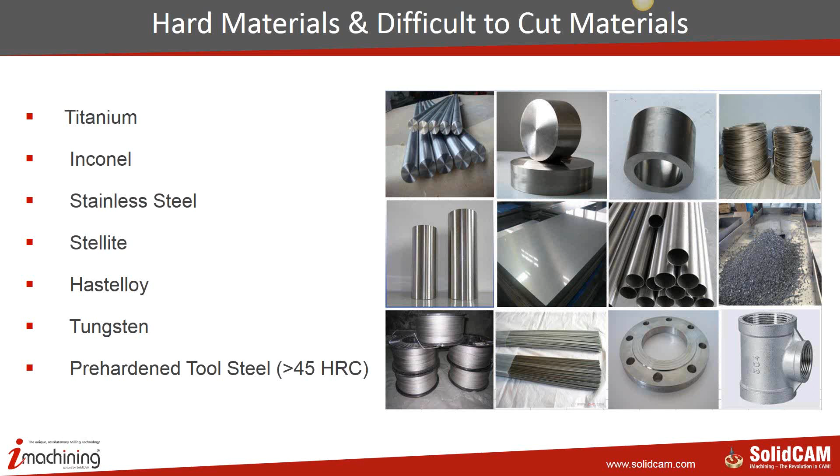So basically, this webinar in the next 45 odd minutes, we're going to delve deeper into the technology of iMachining, how to practically apply iMachining to such materials, how should you look out for tools, how should you look out for lubrication, what should be your work holding, what should be your tool holding, several things along with the programming style and programming strategies.

Inconel, tungsten, and stainless steel alloys, they are very typical materials. Basically, they have got high strength, especially Inconel. It's got a pretty high strength, corrosion resistance. Some of these materials are age hardenable. That means keep them for a longer time, they start hardening up. High heat resistance, and they are also pretty stable.

For example, Inconel is having a very high heat resistance, and it's pretty stable at very high temperatures, close to 1,000 degrees. It can withstand a lot of heat. Now, because they have this high heat resistance, it also means that they have got very poor thermal conductivity. Now, this is one of the reasons why machining such materials is really difficult, is the conductivity of heat.

Inconel, for that matter, has got a rapid work hardening tendency. So if you're not careful with your parameters, if you're not careful with your lubrication, after the first cut, you could be inducing work hardening into the material, and then the subsequent next cut becomes very difficult to take. Tools just chip off, they just burn out while cutting Inconel. And obviously, putting all of these things together, except for aluminium, most of these alloys have poor machinability.

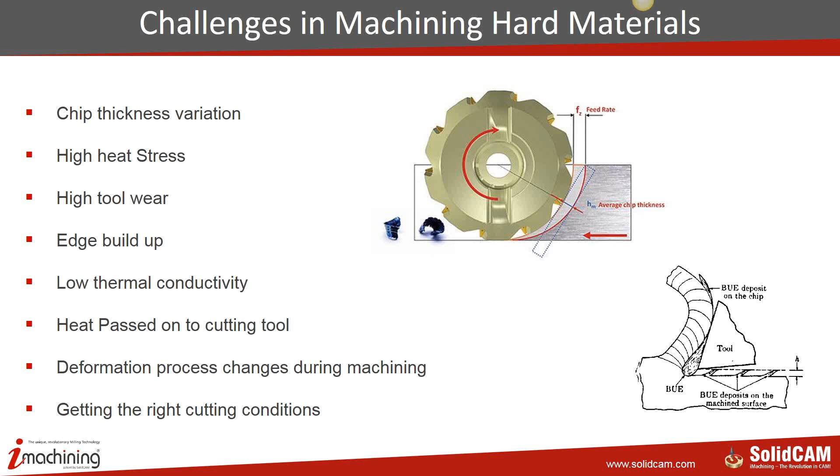Now, if you look at the machining process itself, there are several things that influence the machining. First of all, the machine: the power of the spindle, the construction, the rigidity of the machine, the rigidity of the axis, and what control you're using on it. These factors affect our machining from the machine side.

The other thing that influences machining is the cutting tool itself. What grade of carbide? What is the tool geometry? How are you holding the tool? What is the helix angle? How many flutes? There are several things from the tooling side that also affect machining. The other important aspect here is your work holding itself.

If you have poor work holding, you cannot be aggressive with cutting. You have to drop down all of your aggression and go with a very low or moderate level of aggression. But if your holding is extremely good, like Schunk kind of holding devices, where you hold very little and it has a really high clamping force, you can be more aggressive in the cut. And sometimes aggression can actually increase your tool life in the case of materials like Inconel.

You also have the coolant. There have been several experiments on having everything perfect, and experiments have concluded that a cutting fluid lubricant with 8% cutting oil mixed with demineralized water can give extremely good tool life. Even varying the percentage of the oil in the demineralized water can make a big difference.

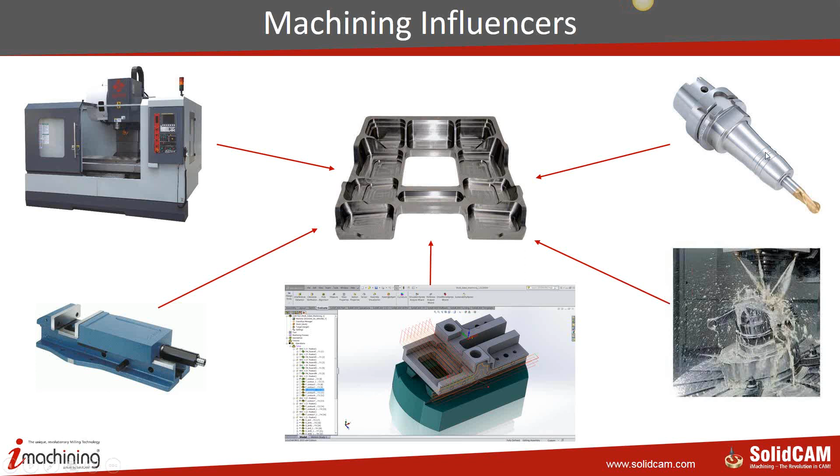From our side, we don't have much control of the machine, the tool holding, the coolant, or the work holding. But we can greatly influence the creation of cutting conditions and adherence to the cutting conditions using a program called iMachining. So you have to understand what iMachining is all about.

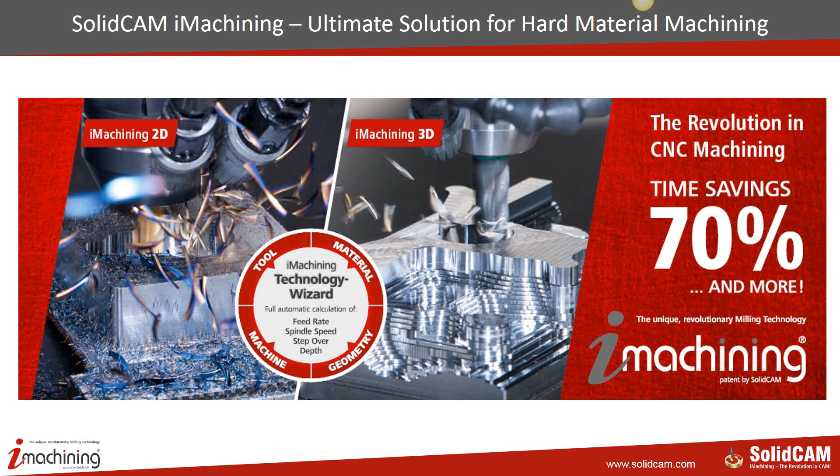iMachining basically is a revolution in CNC machining. It's the next step after CNC was born, because it has taken the CNC world by storm, basically because it's an out-of-box solution. It doesn't go by the conventional rules of machining; it's completely out-of-box, yet adhering to the basic principles of milling.

These features are like productivity increase and time savings by shortening the cycle times by 70% or more, and dramatically improving the tool life. I'll explain to you how the tool life goes up, because we have documented evidence that the tool life goes up dramatically.

It's said in iMachining that the harder the material, the better the performance of iMachining, and it's true; we have seen with our own eyes that the performance of iMachining goes up exponentially when you cut really hard materials.

Now, one of the biggest features of iMachining is its ability to handle small diameter tools. You would have seen other softwares also talk about toolpaths similar to iMachining. But if you observe closely all the videos of other systems on YouTube and other places, you will notice that none of them really talk about tools less than 12 diameter or 10 diameter. Nobody talks about 6 diameter, 8 diameter, 4 diameter, 2 diameter.

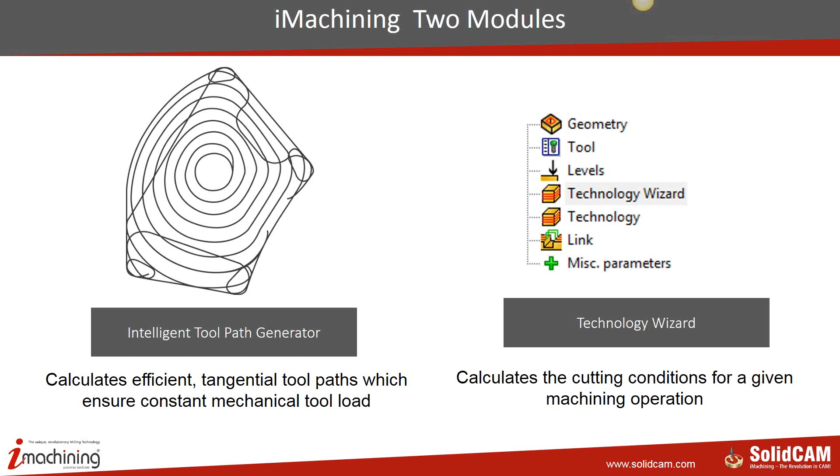So both of these generate a very intelligent toolpath, which has got a very unique pattern, and the pattern follows those set optimal cutting conditions. So the end result is that you get a very intelligent toolpath, which is ready to run on the machine.

If you look at the difference between iMachining toolpath and standard cutting toolpaths that you see in CAM systems, the standard cutting toolpaths have the philosophy of using a traditional step-over principle, where they take the outermost boundary and keep collapsing it by offsetting it until it reaches the center and it cannot be offset anymore. And this offset is based on the step over that we define.

Now imagine your tool, okay, on this particular path here. When it gets to this particular path, or worse condition, when it gets to this path here, the tool, as you see here, is completely engaged, more than 180 degrees. Now imagine if you're taking a big depth of cut and you've engaged the tool more than 180 degrees, the amount of cutting force that is there on the tool is going to be tremendous.

That's why when I say that iMachining excels when you're using a smaller tool when cutting, it's that when you cannot control your tool load, and if you're using a smaller diameter tool, you're going to break the tool straight away, because the force acting on the tool is so high that your tool will just chop off.

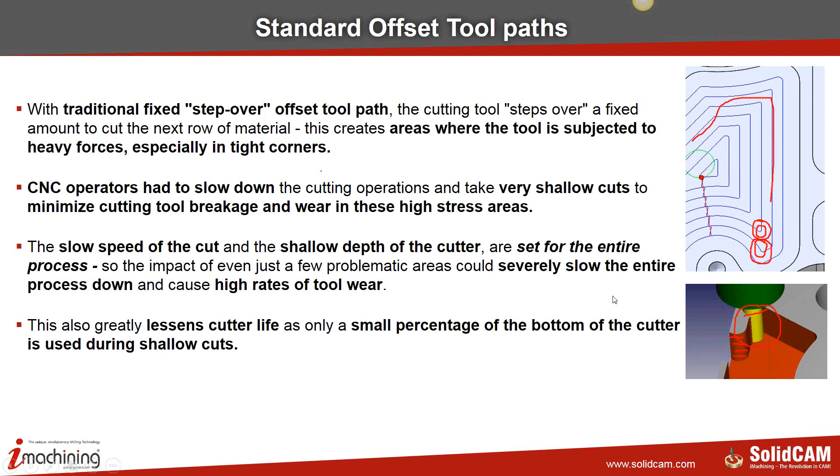So iMachining overcomes the majority of the problems that the conventional toolpaths are offering you. First of all, it generates smooth tangential toolpaths. So even when there's a change of direction, it's pretty smooth.

It doesn't put any kind of load on the axis. So the tool paths are always tangential. We have another patented technology, and that is controlling the step overs. We have a minimum and a maximum step over based on the engagement of the tool with the material.

So if the engagement is more, you will see that the step over is less there, and if the engagement is less, the step over is more. Now, based on our step over and engagement, the feed rates are calculated. So if you have got more engagement or a bigger step over, the feed rates drop down. If the engagement reduces, the feed rate goes up.

This is done to ensure that you have got a uniform cutting load, or my chip thickness is going to be uniform throughout the cut. It doesn't matter if you're cutting a straight line or an acute angle. My chip thickness is going to be the same.

We also have exact stock machining. That means we precisely know how much stock is remaining and where it is remaining. So we don't just go and cut air, but we precisely know where the material is remaining, and we cut exactly the stock.

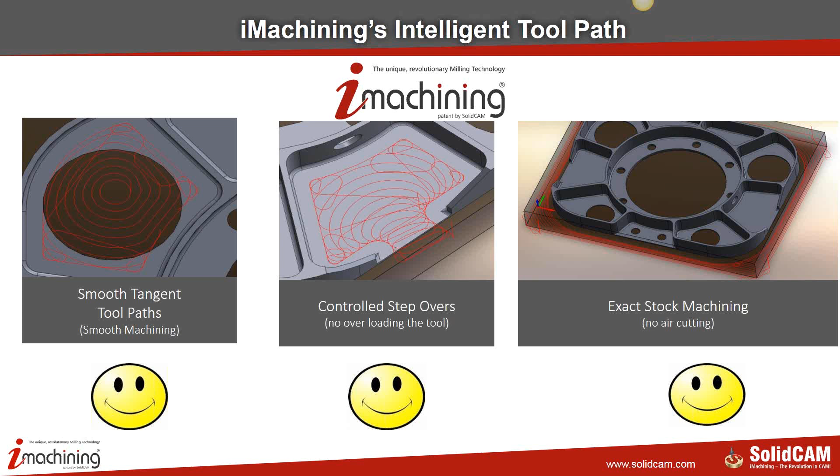So if I have to sum up the features of iMachining, it's got a unique tool path pattern, like what you see out here, and it's got constant cutting force based on engagement angle. It varies the engagement angle, thereby dropping or increasing the feed rate, maintaining constant chip thickness. Optimum cutting conditions, generated based on machine, material, tool, and geometry.

And the most important thing is vibration control, where we can predict, even before the machine is started, what kind of chatter we are expecting in this entire process. And we also have ways to avoid it, which we're going to see soon.

Now, how did iMachining start at all? Many people, when I explain iMachining to them, especially the cutting tool people... Excuse me.

Sorry. I was explaining iMachining to some of the cutting tool vendors, and they came up with this statement saying that we generate a very high VC and their cutters are not suitable for such a high cutting speed. And that brings me to this slide of Solomon's theory of high-speed machining. If you remember a couple of slides back, I was referring to low depth of cut and high feed rates. This is exactly going to be the other way around.

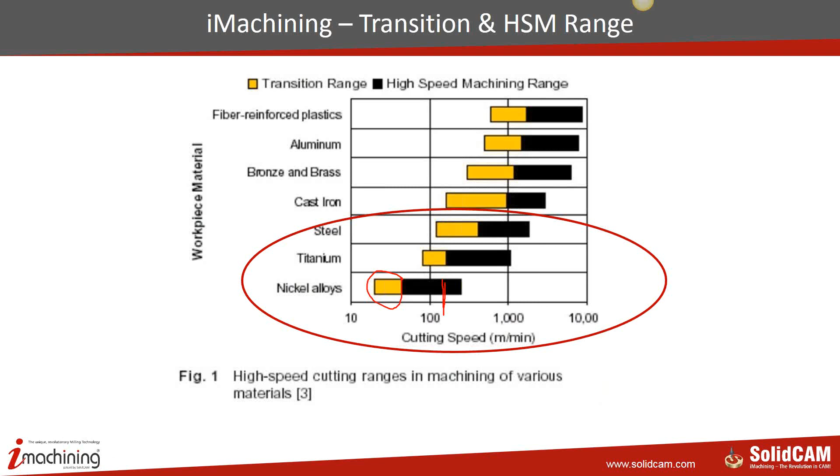So the general thing is, if I push the VC so high, will my tool withstand a material like Inconel at that high VC? Would I get tool life? The results were dramatic. From a 28-minute life, we went up to 86 minutes for the same tool, for the same material, Inconel 718. So we pushed the tool life to more than 3 times, 300%. And it's not magic. There is a lot of science behind this, and I'll explain to you why my tool life goes up even when I push the VC 3 times.

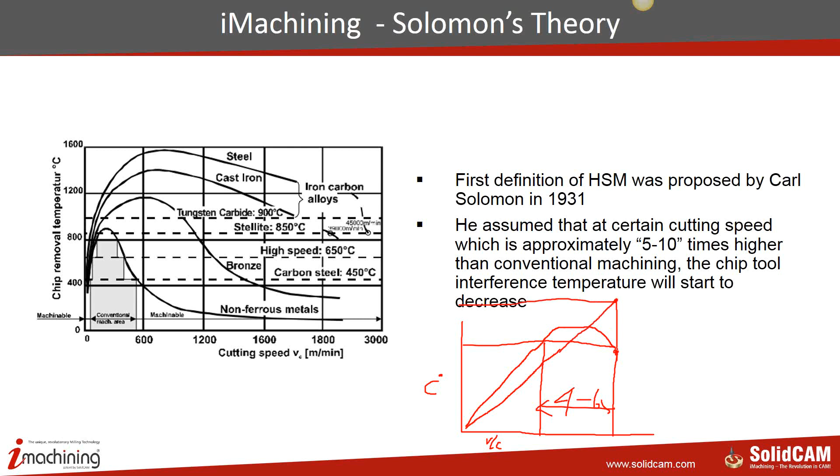Let me go back again because it's pretty interesting to come back to this figure where I explained to you that at 5 to 10 times of this VC here, I get a lower temperature. Because at 5 to 10 times, if I had to really trust my tooling guys, this would have been my temperature. But actually my temperature is much lower. So what is causing it? That can be best explained by this slide. So this basically is explaining to us the temperature balance process.

When the first contact of the tool happens with the material, the cutting edge temperature rises. When the cutting edge temperature rises, the material starts transiting from solid to plastic phase. When it is in the plastic phase, the cutting forces to cut that material are brought down. Because my cutting forces are reduced, I spend less energy to cut. Now, because I'm spending less energy to cut, I'm producing less heat.

So you see, Solomon was right when he said when you push the VC to 5 to 10 times, you're actually producing much lower cutting edge temperatures. So your heat produced is much lower, and the cutting edge temperature actually goes down. And within a split second, it goes into an equilibrium where your temperature is always low at that high VC. So temperature rises, transition to plastic phase, cutting forces are reduced, less energy is expended, less heat is produced, which means my temperature is down.

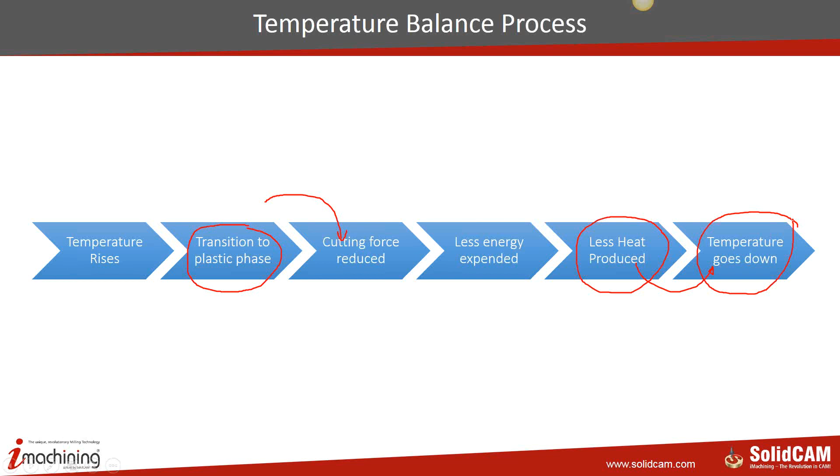iMachining, like I said, works on the principle of constant cutting force. And the constant cutting force is derived by managing the cutting angle, or the section of the tool engaged with the material. So we have got a minimum and a maximum cutting angle, and iMachining keeps the tool between the minimum and maximum engagement angle into the material, and thereby it drops or increases the feed rate to maintain constant cutting load. And this is over the entire cutting length, the flute of the tool.

Because of this philosophy, we can use small cutting tools. So if you go to YouTube, you'll see a lot of videos done with 2mm end mills on really hard materials, which perhaps you would not see with other systems which claim to have iMachining kind of toolpaths inside them.

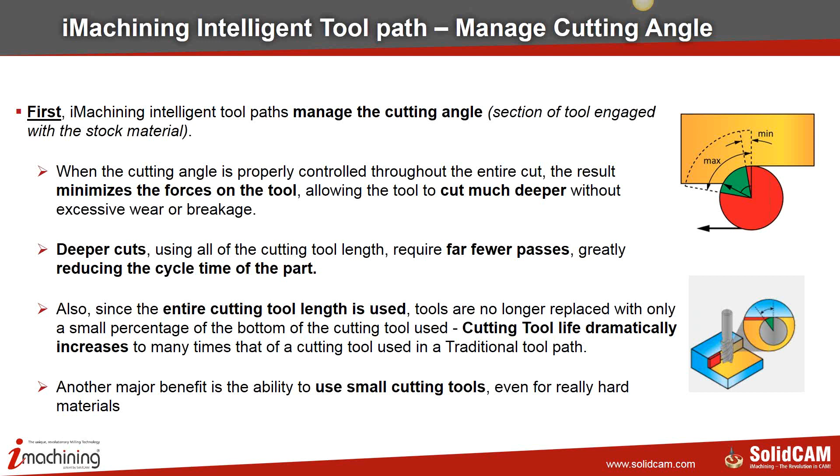Like I said, when you have different engagement angles and you would like to keep a constant chip load, for example, if you have a minimum engagement angle of 20 degrees, you have got a certain feed rate. Now if that engagement angle goes up to 60 degrees, in order to maintain a constant chip, I have to drop my feed rate. So iMachining intelligently increases and drops the feed rate based on the engagement the tool is making with the material, and thereby generates a constant load on the tool.

And if you go to any tool manufacturer, they will always say the life of the tool is estimated at a constant cutting load acting on the tool. So if you are going to vary the load on the tool, you're actually going to reduce your tool life dramatically.

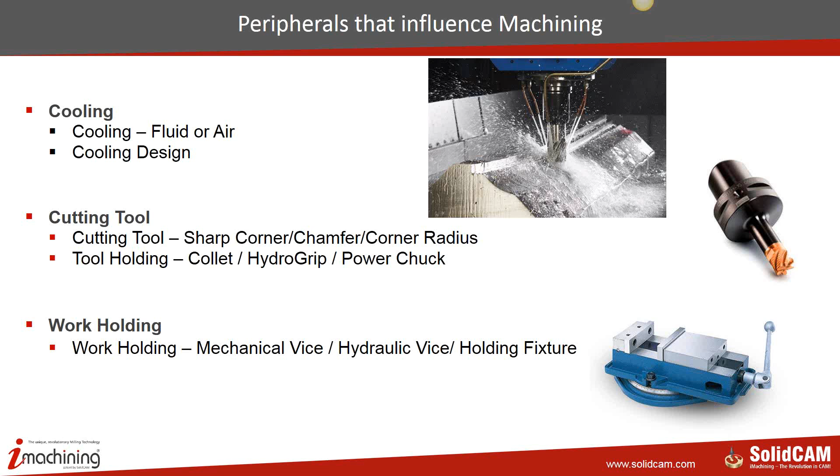Cooling plays a very important role, especially when you're cutting Inconel and titanium. We did a lot of cutting with Inconel and titanium with several of our customers and tooling vendors, and we realized that if we want to have a very good tool life, the first important thing is to have high pressure coolant.

So if you're cutting titanium, Inconel, or stainless steel, you must always use fluid lubricant, okay? Because these are sticky materials. And the goal here is to throw the chip out and, more importantly, cool the tool because the heat is being passed on to the tool.

For steel we recommend air, okay? If you're using air, direct, if possible, cool air. If not, even room temperature air is good enough. And this is a must for steel. We're talking about anything beyond 45, 50 HRC, start using air.

Because in steel, it's exactly the opposite. The heat is not actually being passed to the tool. The heat is being carried away by the chips. So if the chip remains in contact with the tool for a longer period of time, it's likely that it will pass the heat. So the moment a chip is generated, it must be evacuated. And the best way to evacuate it is to use air, right? So for steel, air.

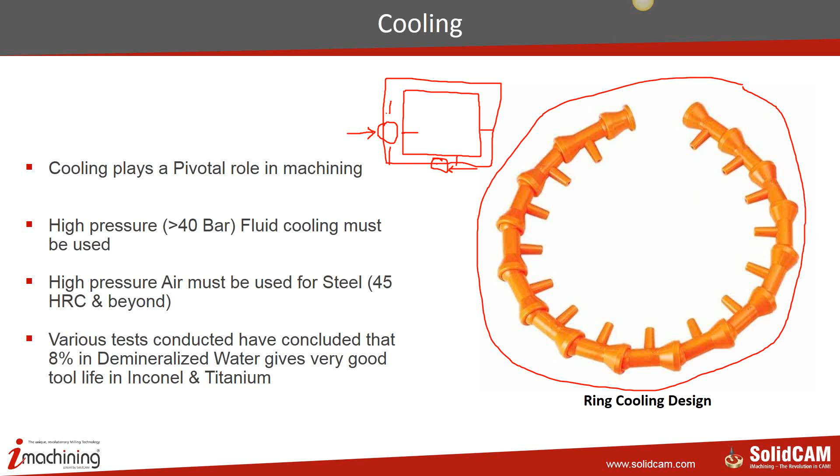Cutting tool: we suggest that when you're trying to cut Inconel or titanium, you need to use as big a tool as possible. Of course, if the geometry doesn't allow, then there's no way you could use a bigger tool. But if the geometry allows, we'd always suggest you go with a bigger tool because that has got more strength.

We suggest that you use a cutting tool with a corner radius. We have seen that sharp corner tools increase chipping because the force acting on that very small area is very high. So generally, in the very first contact, you can see that it will chip off. And why corner radius? In experiments done with Sandvik, they found that tools with corner radius give you much higher tool life than tools with chamfer. We never considered tool life with sharp end mills because generally they don't survive.

The other very important thing when you're cutting Inconel or titanium is that you should insist on tools that have honed edges. Very fine honing is done on the edges so that the edge is not sharp, but blunted to give you a very fine radius. This radius gives great strength to the tool, and the tool life jumps up dramatically. So ensure that your tools are honed and not just ground sharp.

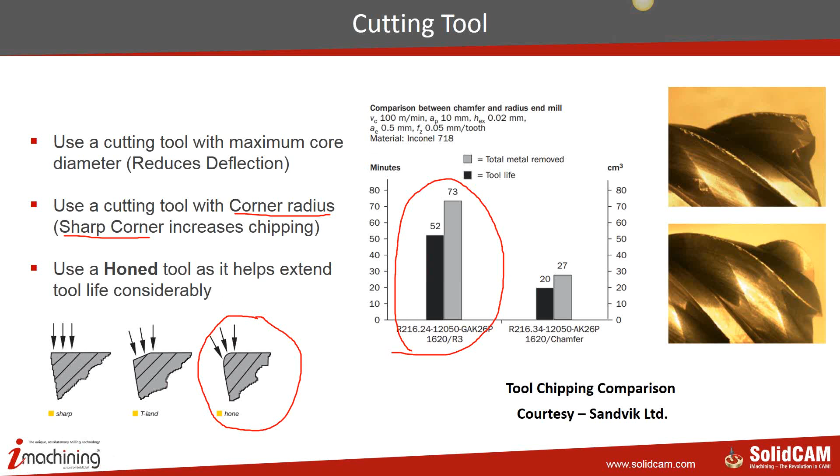Tool holding: we just do not suggest the use of collets when you're machining tough materials. When you're machining aluminium, in some cases it's okay because with smaller diameters collets are fine, but with tough materials, stainless steel, Inconel, titanium, collets are a big no. We suggest you use hydro grip, power chuck, or shrink fit mechanisms to hold the tool. First of all, they minimize the runout, and that increases the tool life. It gives great stability for cutting. There are no vibrations induced because of poor holding.

And because of high clamping forces, they help prevent pull-out of the tool, especially when you're using iMachining, because in iMachining, like I said, the axial forces are very high. So tools can be pulled out if you're using collets. And for every 10 microns of added runout, the tool life goes down almost by 50%. This is not just me saying it, this is a statement by the majority of tool vendors. When you ask them what difference a hydro grip or power chuck makes on tool life, this is what they say: it reduces the runout, and reduced runout means higher tool life.

The other important thing that you need to do inside iMachining is decide the feed rate control on a corner or going over an arc. Now what happens is pretty simple. Again, let me explain using some simple curves. This is my edge and my tool is rolling over here. This is the direction the tool is going. Now this point here is a very small area. If the tool is here and the tool is here, this is point 1 and this is the next point.

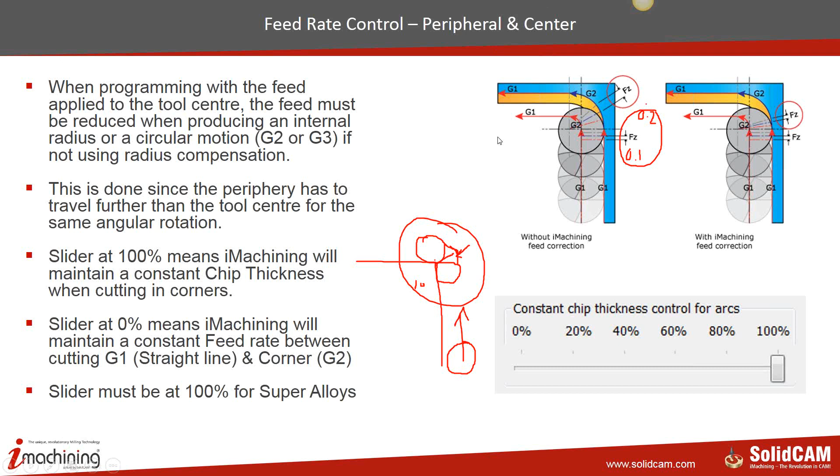The other important thing we need to figure out is that, in spite of all these things we specify inside iMachining, what we forget is that these are all theoretical values. For example, iMachining needs us to define the ultimate tensile strength of the material and the machine properties. Especially the machine and material characteristics are theoretical values. So we need to determine them first, especially when cutting Inconel and titanium, because this can dramatically alter your tool life. Let's say you've got a block of stainless steel from your customer and I would like the exact cutting conditions for it. First, I need to determine the machinability of that material.

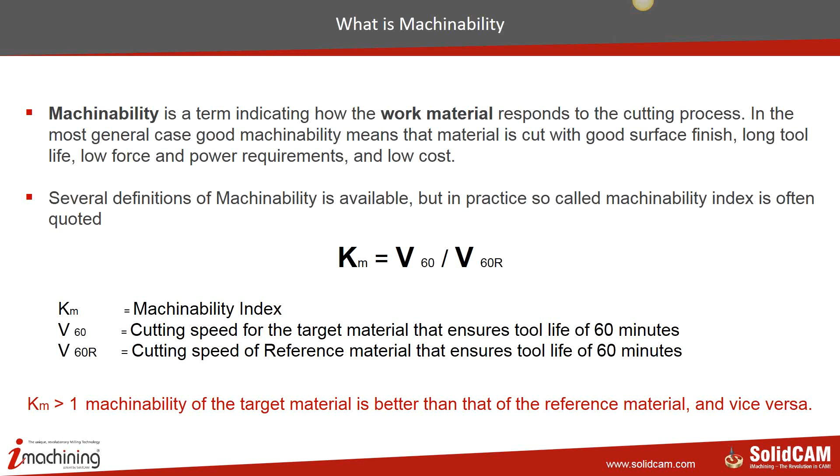What is machinability? It's a term that indicates how the work material responds to the cutting process. We have a mathematical formula for that, where Km is the machinability index, V60 is the cutting speed for the target material that ensures a tool life of 60 minutes, and there's a reference material cutting speed that ensures a life of 60 minutes. If Km is greater than 1, the target material is better than the reference material. If Km is less than 1, the target material has poorer machinability than the reference material.

So how do we calculate machinability? Let's say AISI 1112 steel has an index of 1; this is our reference. Machining this steel at 0.5 meters per second gives a tool life of 60 minutes, so our V60R is 0.5 meters per second. For stainless steel 302, if I machine it at 0.23 meters per second, it gives a tool life of 60 minutes. So my machinability is 0.23 divided by 0.5, that's 0.46, which means the machinability of SS302 is lower than AISI 1112 steel.

For AISI 1045, it's 0.36, so a tool life of 60 minutes is achieved at a cutting speed of about 0.36 meters per second. So the order of machinability would be AISI 1112 first, AISI 1045, and then SS302. That's how machinability is determined. But for us, machinability has to be determined in a completely different way, because these are theoretical. We can't depend on theory; we have to go down to the shop floor to determine the machinability before we start cutting with iMachining.

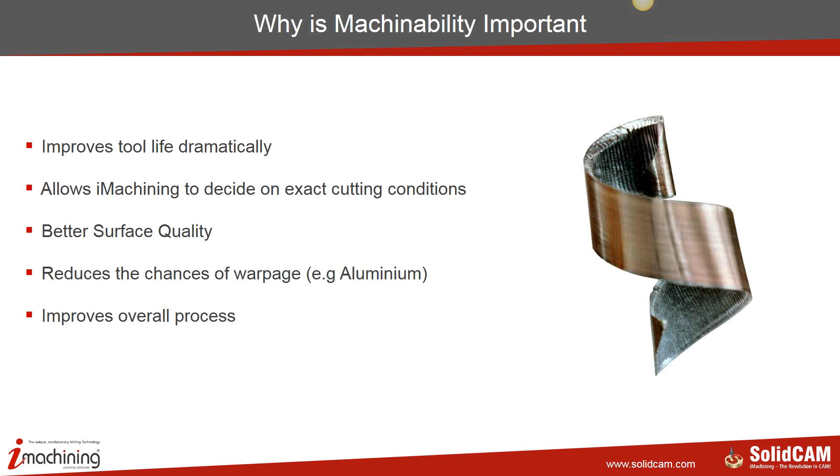Now, like I said, why can't we simply stick to the value that's being given to us by the material supplier? Why do we need to go to the shop floor to determine machinability? The structure of the material itself, microstructures, the mechanical strength, hardness, hot hardness, work hardenability, thermal properties, all these things are influencing the machinability.

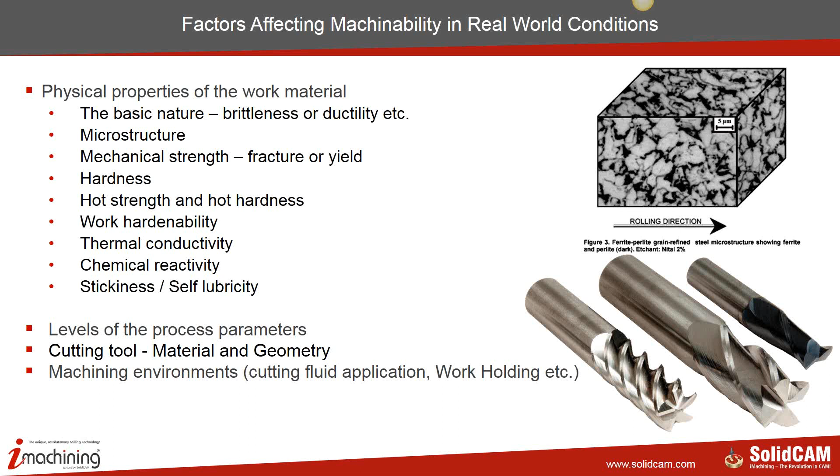The level of process parameters also influences the machinability. The cutting tool material also greatly influences the machinability, and also the machining environment, cutting fluid application, work holding, etc. They also affect the machinability. So what we tell every customer of ours, to determine machinability, especially when they're cutting SS, titanium, and Inconel, is to take a sample block.

And what we did here was just to explain to you how it works. We've just taken a sample AISI steel, 100 by 75 by 50. We made this step, and the step depth is 24, and the width of that step is about 10 millimeters. We are using a 12 diameter end mill, 4-flute, 45-degree helix, and a Mazak FJV machine with a 10 kilowatt spindle.

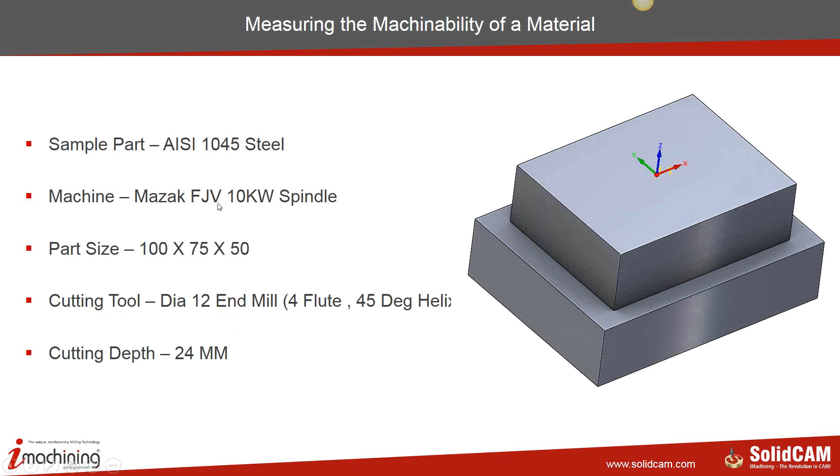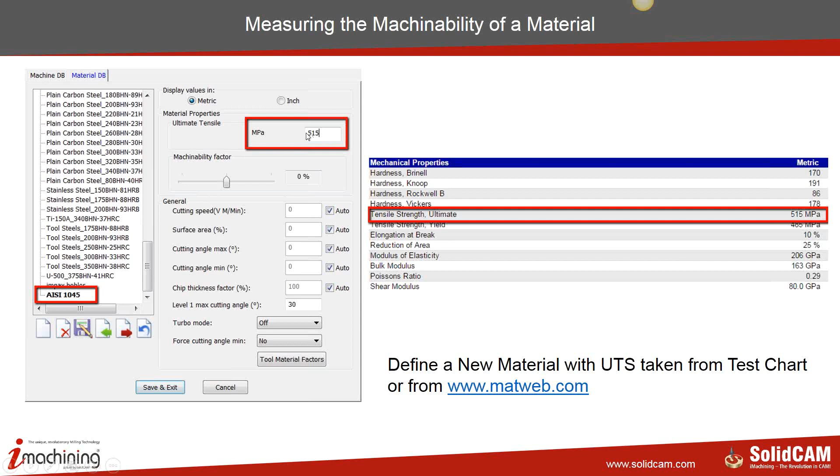So we go first to the material supplier or to MatWeb to find out the tensile strength of this particular material. Define that in iMachining, and we generate a tool path at level 8. This is the highest level inside iMachining. We generate the highest MRR, material removal rate. We generate the tool path, but we have to ensure that we get ACP.

Now, what is ACP here? ACP is pretty important. Again, let me make a drawing. My tool is in contact with the wall. My tool has a diameter, and it has a helix and number of flutes. ACP is basically the contact points the tool is making with the wall. Now, if you have a whole number, like in this case 2, it means the forces are acting only in one direction, which means that I'm going to have a very stable cutting.

But if I get this value as 2.6 or 2.4, it means there is one point that is floating, where the forces are acting in every direction possible. This causes unstable cutting, and unstable cutting straight away causes vibration, and the direct effect of vibration is chatter, and sometimes you could end up damaging the tool. So it's important that, for the sake of testing, we at least generate a whole number of ACP.

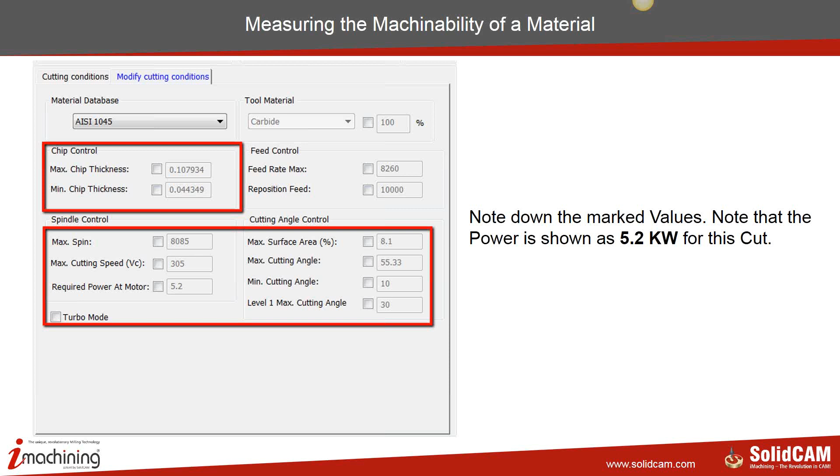We generate the tool path, take the G code, go down to the machine, and we run the machine. Because the material might generally have some variations, after the first 2 passes are done, we start observing the spindle load meter. Till the machining is finished, we'll note the spindle load meter.

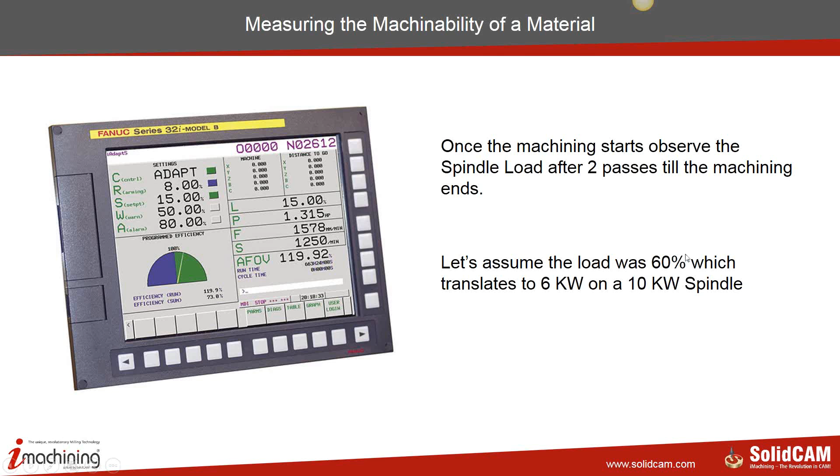Assume in this case, we get a spindle load of 60%. The spindle load meter is showing 60%. We just note down that it is showing 60%. We come back to our system. But as per the UTS that we defined, 515 megapascals from MatWeb, we should have had 52% load, but we're getting 60% load.

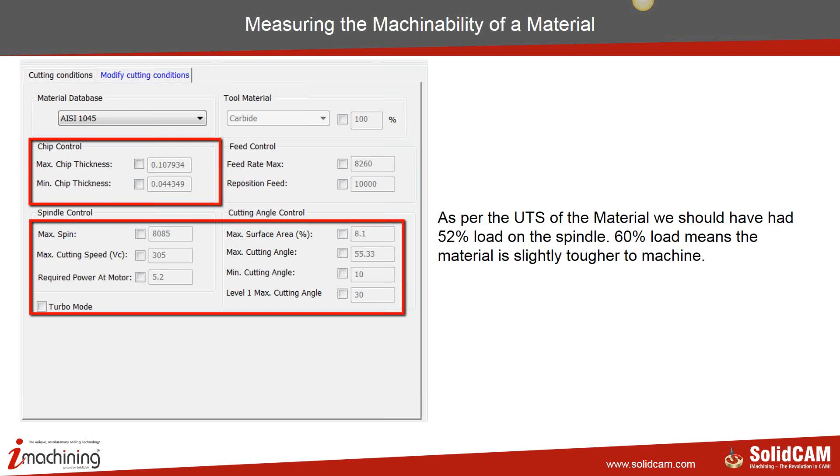That means this material is slightly tougher than what the UTS is suggesting. So now we need to arrive at the exact machinability of this material. So what do we do? We go back, and we have a machinability factor inside when we define the material. We push that down to 16%, roughly 16%.

We save and exit, go back, and we put down the same conditions again: the same cutting angle, the same maximum VC, and the same maximum chip thickness, because this has to be the same as it was when we started cutting. So when we put that, we immediately get the power, which shows that we are going to get 6 kilowatt.

Now, the moment we are close to what we see on the machine, you can be assured that this is the machinability of that material, which was not 0, but minus 16. That means the material that's come in this batch of, let's say, 200, 300 blocks has a machinability which is 16% tougher than the reference material that we got from the web.

Now, what this does basically is give iMachining a more accurate picture of the material to come up with accurate cutting conditions. Remember that this particular test has to be repeated if there is a change in either the batch material or if you're changing the machine, because the machinability can vary to a small extent, but mostly it is done when the batch of material changes.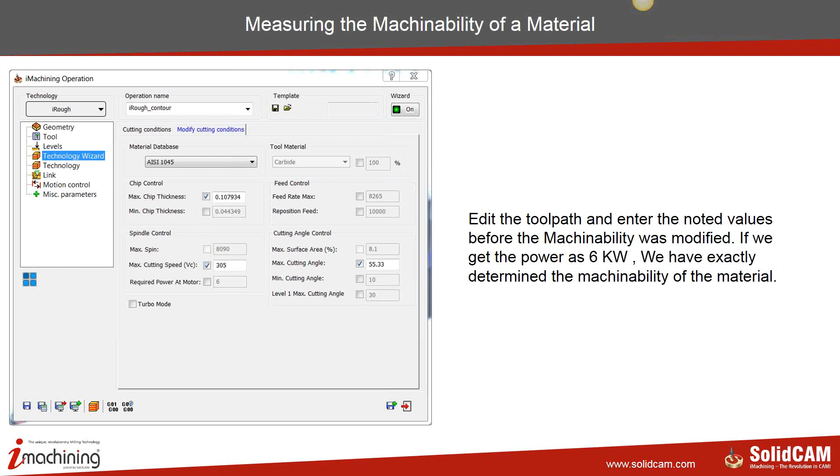Like you have one batch of 200 blocks, you machine it completely, you get another batch. Probably it is taken from another billet. So you need to run this test again to figure out the machinability of this particular block. Remember, we are not changing the UTS, we are only changing the machinability, because UTS doesn't always give you the complete picture. We'll come back to this particular example in a moment.

Just go into iMachining, and I have got this nice block out here. Now this is a mold part, and I would like to rough this out. The stock is basically a block; we're going to cut it out from a block. Now, before we start machining, it's very important to understand which iMachining should be used. Should we use the 2D? Should we use the 3D?

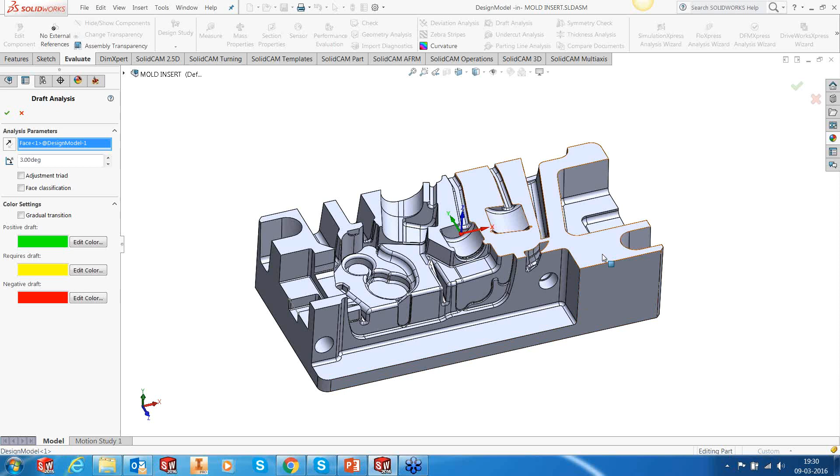Generally, the philosophy of all programmers is that if it's a 3D model, let's just dump 3D and let it do everything. But if you're a smart programmer, you'll analyze this part and say, there are several areas in this that can be done with iMachining 2D. And we know iMachining 2D doesn't care about scallop and other things, it's just used for volume removal. It's very fast. So the first thing I generally do when I get a part is check what draft is available.

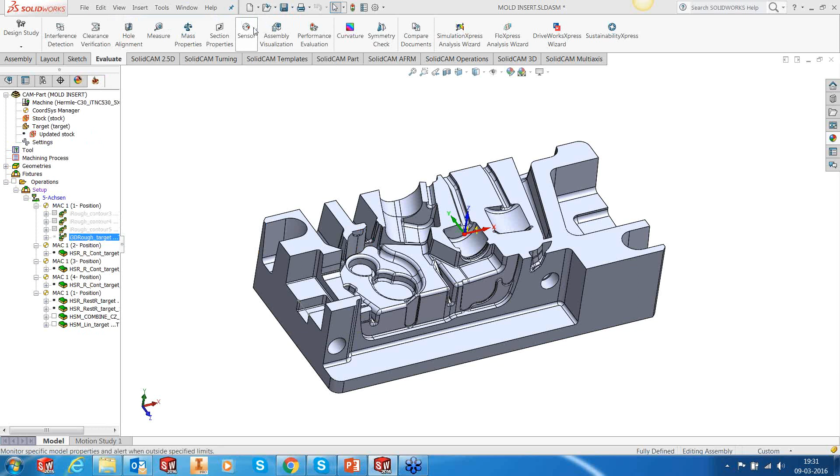I see there are several areas that have straight walls or no draft at all. So basically I can straight away apply iMachining 2D. I'm going to add a milling operation, iMachining 2D. I already have the contours defined, so I'm going to use one of these contours. And I'll pick the tool. I'm going to use a 16 bull nose with corner radius 3.

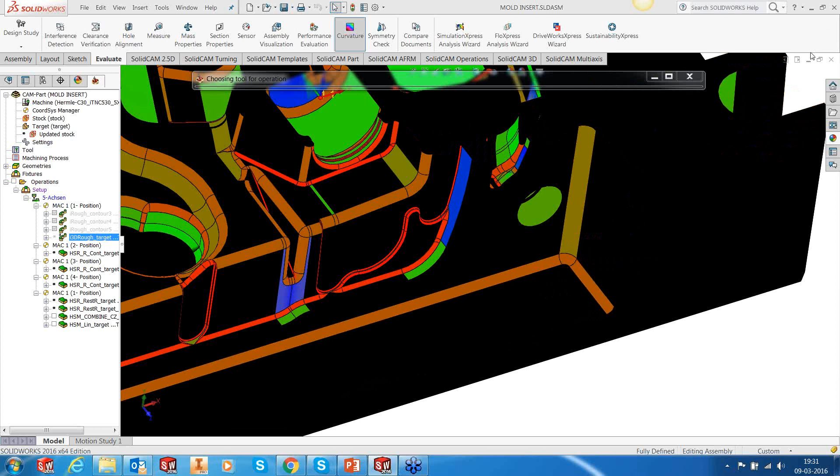Now, again, I'll go back into evaluate and check for the curvature. You can see here that curvature is 3. The general principle is to use a tool corner radius that is more than 3 or exactly 3. I could even use a corner radius of 2, but for hard and tough-to-cut materials, the corner radius should be bigger. The bigger, the better.

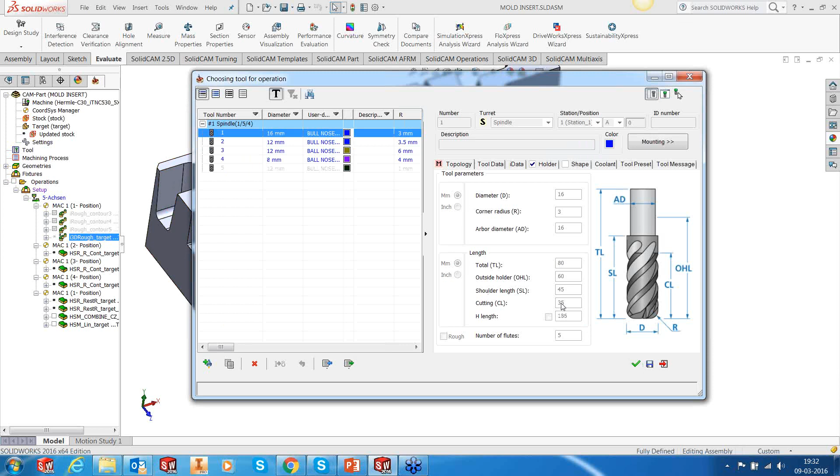So I'm going to pick 16 bull nose, corner radius 3. You can see that the tool outside holder is only 60. This is something I need to take care of. I can't go to pocket depth here. This is 70, I can't use this. I'll have to stop it at 55 millimeters. That's one drawback of iMachining 2D, that I need to define my depth. But the pros outweigh the cons, so I'm going to go ahead with it.

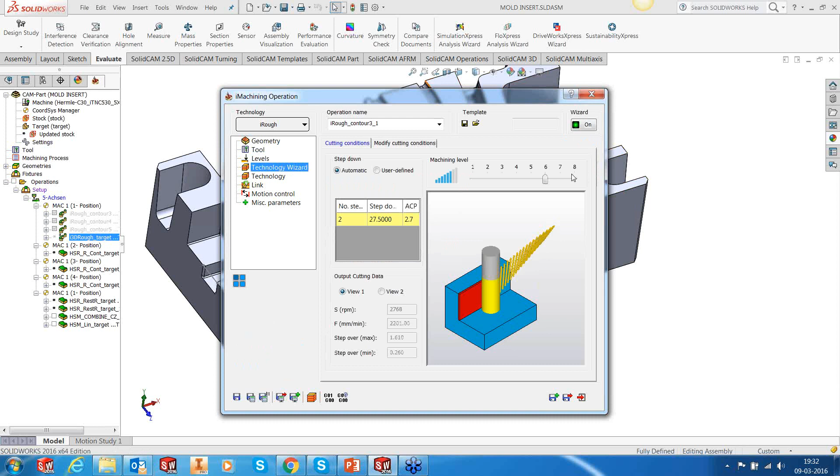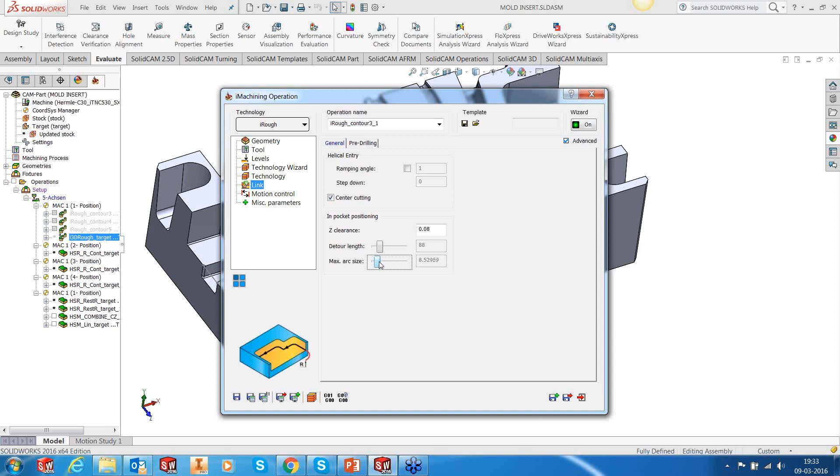And I'm going to use level 6 straight away. You can see that it's just using 4.5 kilowatt, and this machine is 15 kilowatt, so I have a great amount of leeway. I'm going to keep it at that. I would like to keep a stock of 0.3 millimeters. And let's change this to 8 millimeters, that's half of the tool diameter. And let's hit save and calculate.

Okay, this tool path is calculated. It's pretty quick. It doesn't care about your scallop. And if I run the simulation, you can see that it just opens up on a steel of 35 HRC. The time taken to cut a slot of 55 millimeter is about 9 minutes. Very quick, very fast.

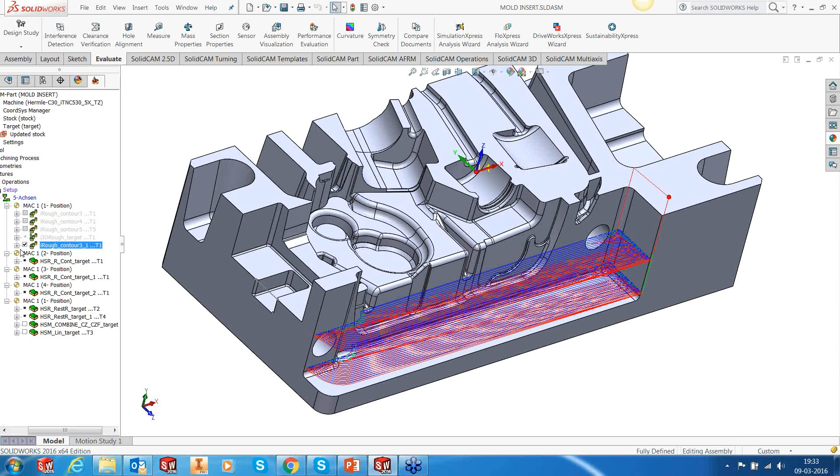Similarly, I have got one more area here and another area out here. So I can simply copy this tool path, or I already have got a couple of these tool paths here, so I'm going to copy them and paste them below here. Okay, and hit calculate, because this is going to machine this pocket here. You can see that it's already generated the tool path for this area.

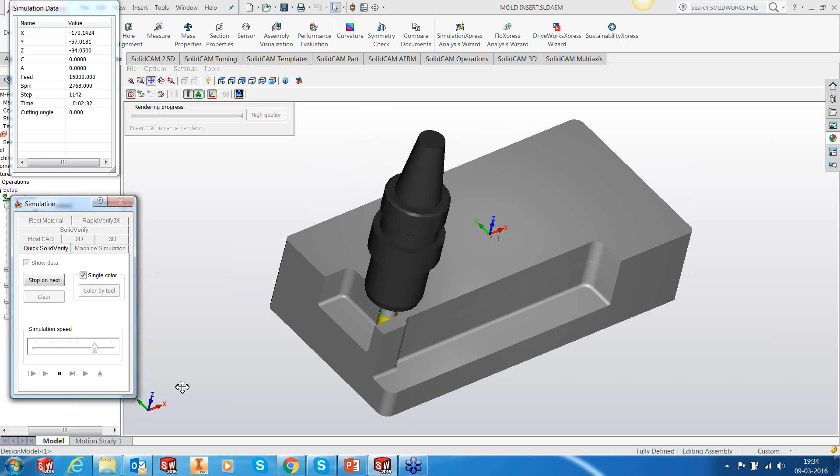So let me simulate. Because these are straight walls, I can quickly generate with iMachining 2D, and then I could apply for the remaining areas. For example, 2 minutes 40 seconds. This is opened up. Okay, and the next one is for a small area here. I'm using a different tool.

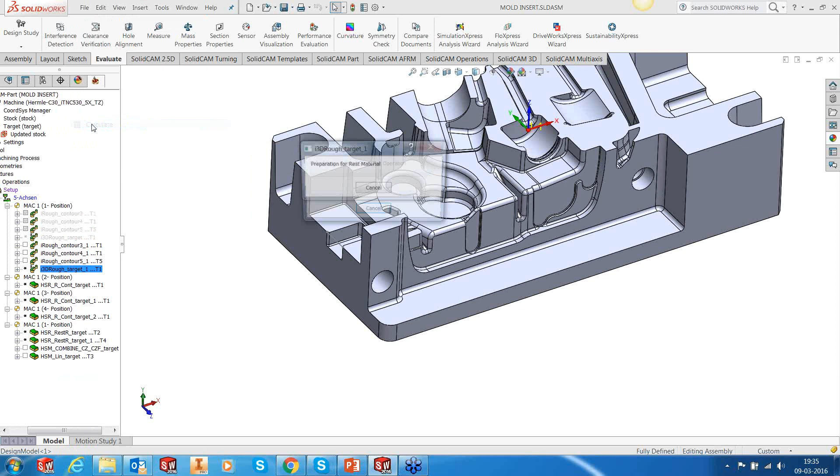Okay, so I have opened up in a matter of 11 minutes. Majority of areas, the big areas are already opened up. What remains now is a smaller area which has got a lot of contours. So there I'm going to use iMachining 3D. So I'm going to put it for calculation, and then we can move to the next slide. While this is being calculated, which is obviously going to be pretty quick, we are not going to see the entire process.

Let me go back to my presentation. iMachining forces on spindle and axis. Why do we say that iMachining generates very high tool life? That's because the load on the tool is constant. And you'll be surprised to see that the load on the tool is much lower than what the load would be on the tool at 1/10 the depth of cut. And this is something that's been measured practically on the machine using several equipments.

The iMachining tool path, combined with the optimum cutting conditions provided by the technology wizard, which I showed you, ensures constant load on the tool in any situation. When you're cutting steel, the tool will always be loaded between 4 to 17%, aluminum can go higher, depending on the level of the slider used and the material you're cutting.

Several machine tool companies concluded that the forces acting on the spindles are the smallest of any CAM systems that are using a similar kind of tool path for high-speed machining or high-performance machining. Hermle concluded the same. Makino concluded the same on A55 and A61 machines.

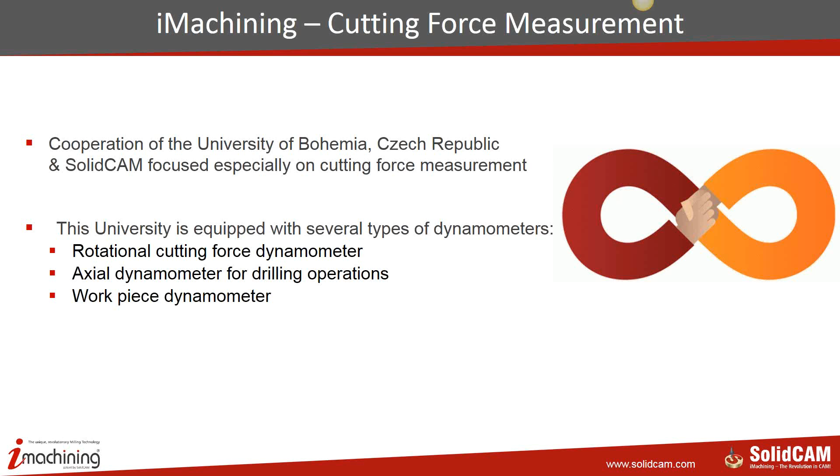However, the proof of the pudding comes from the fact that this whole process is documented and measured in a lab. This was a cooperation with a university in the Czech Republic, and it was focused on cutting force measurement. The university, along with their CNC machine, is equipped with rotational cutting force dynamometers to measure the force on the tool, axial dynamometers to measure forces on the axis, and the workpiece dynamometer to measure force acting on the material.

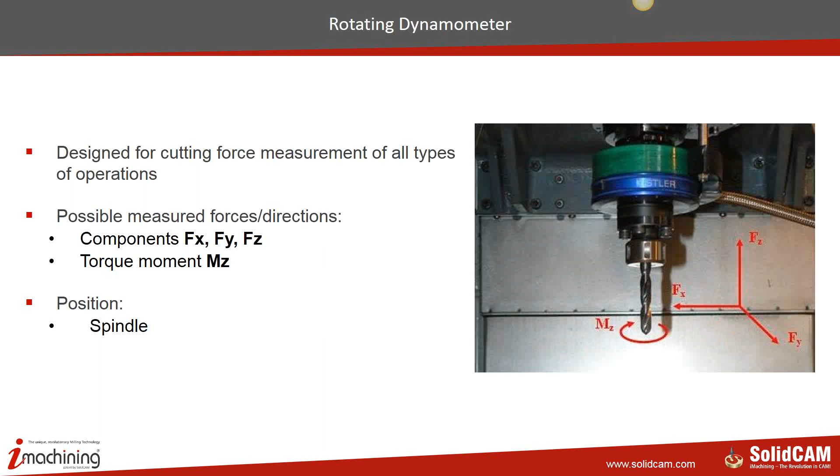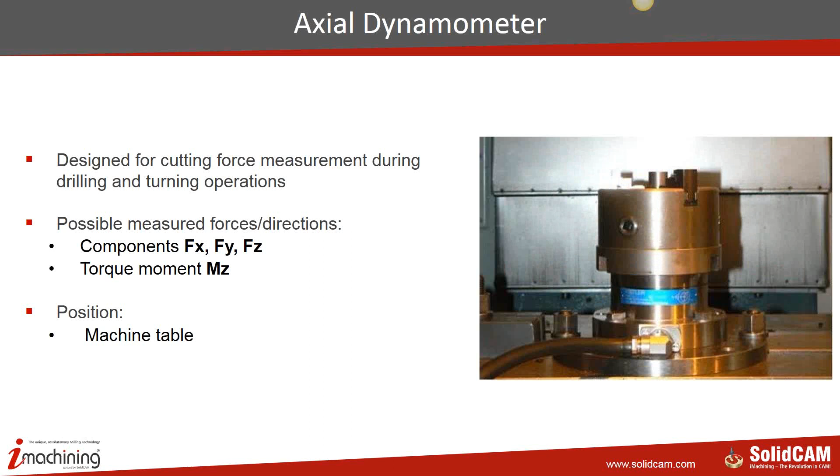So you have got the rotating dynamometer, which is measuring the force acting on the spindle, basically the tool. And then you have the axial dynamometer that's measuring the force during drilling and turning on all the axes on the machine table. And then you have a workpiece dynamometer, which is measuring the force in all directions on the workpiece. The data is transferred by shielded wire.

The PC is equipped with a measuring card that receives the signals from these dynamometers, and each component is processed separately. The spindle is processed separately, the axis is processed separately, the workpiece is processed separately, and they use the software LabVIEW to measure the forces.

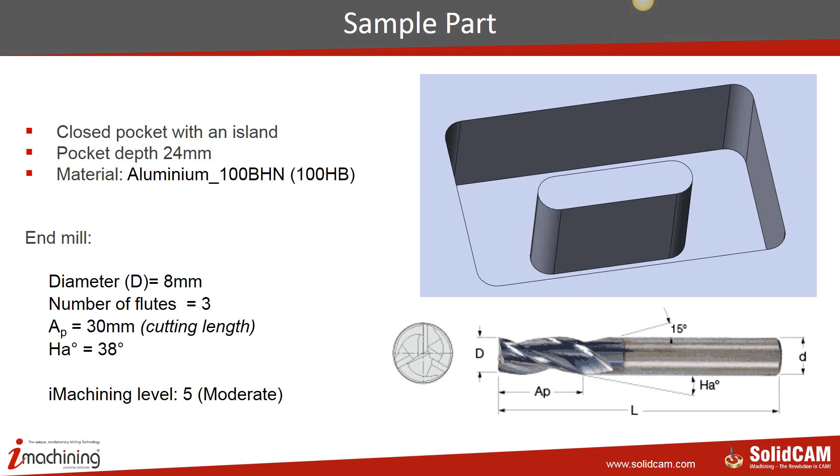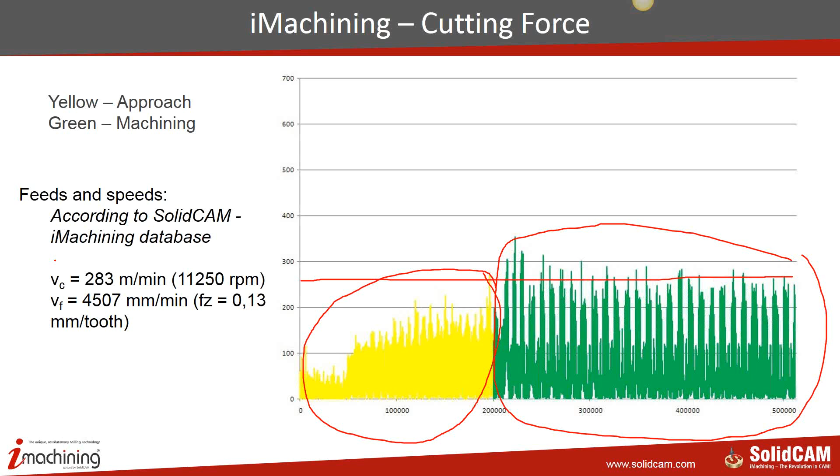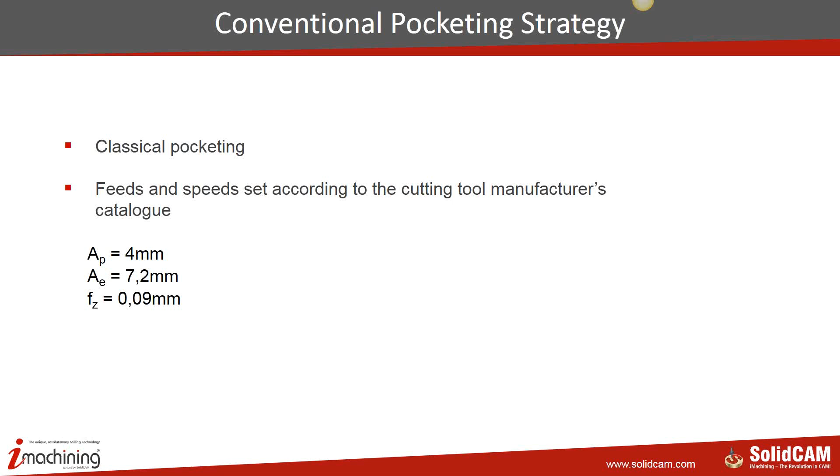You can see that it was about 270 odd at a depth of cut of 30 millimeters with a VC of 283, RPM of 11,250, and a feed rate of 4.5 meters, or FZ of 0.13 per tooth. Then they measured the conventional pocketing strategy. Depth of cut 4 millimeters, side step 7.2, feed per tooth 0.09, and the feed speeds were set according to the manufacturer's catalog. By the way, for iMachining, the technology wizard determined its own iMachining feed rates.

How does this behave with the conventional pocketing strategy? How do the forces behave? These are the forces with conventional classical pocketing conditions when machined at 4 millimeter depth of cut.

That's the average. So we're talking about close to 470, whereas for iMachining, they were somewhere here at 8 times the depth of cut and almost 3 times the feed rate and almost 4 times the cutting speed. The forces of iMachining are much lower than what you expect or what you get in conventional cutting.

Now this is well documented, and this is one of the crucial reasons why the tool life gets dramatically extended even when you're cutting tough materials like Inconel and titanium. That's because force acting on the tool is much lower. We determine optimal cutting conditions to ensure that we generate a constant chip load on the tool, thereby dramatically improving the tool life.

We also have done a lot of experiments with different cutting tool vendors, and one of them was Kennametal, where we generated test results for machining stainless steel P660 and titanium Ti-6Al-4V. It was a simple geometry, but gave us great insight into what iMachining could do.

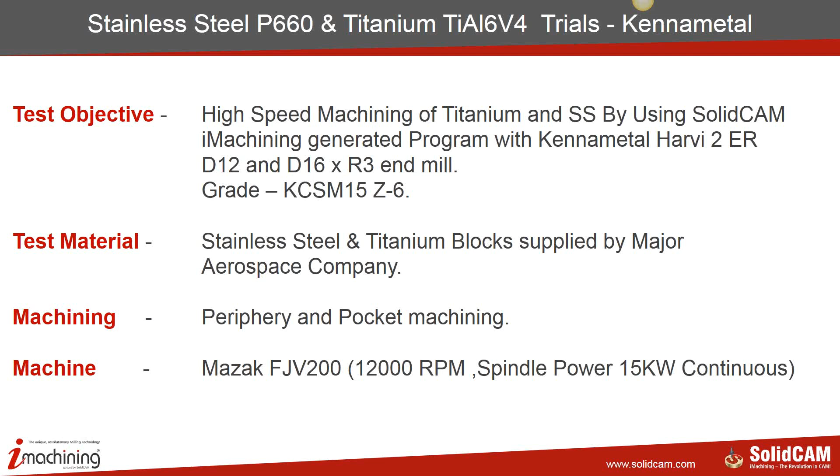250 by 200 by 60, simple stainless steel. Roughing was with a 16 R3 bull nose tool. Depth of cut was 23 millimeters, and VC 171. The suggested VC by Kennametal was about 102 for this particular part. And finishing was with 16 R3 bull nose again. Here the VC was 205. The finishing was done at level 6, which is a pretty aggressive level. And it's almost twice the VC of what Kennametal suggested.

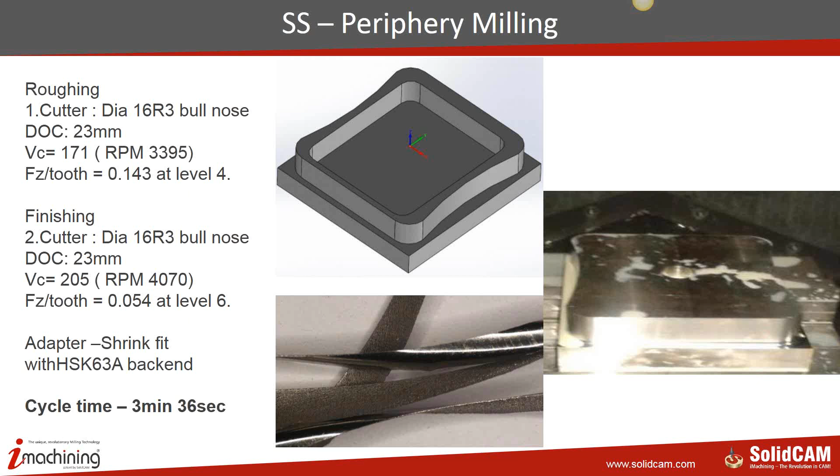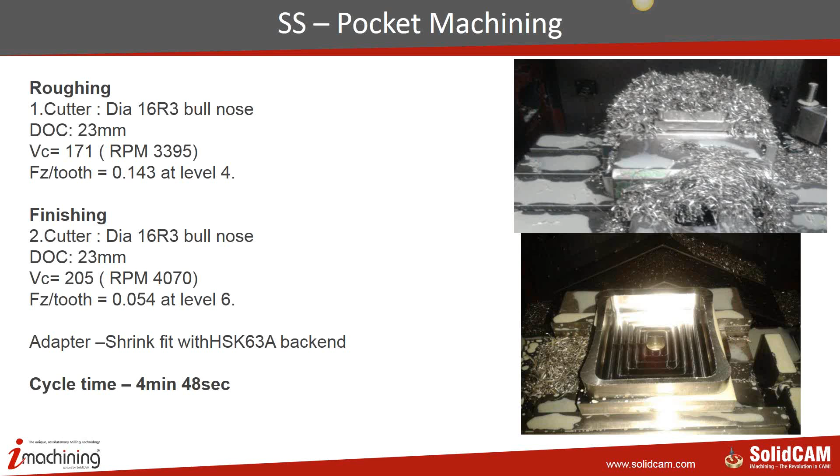Cycle time for roughing and finishing, 3 minutes 36 seconds. The pocket was done again using the same tool. Again, similar results. The pocket finished with 4 minutes 48 seconds.

Titanium, a block of 200 by 175 by 50. Cutting diameter 16R3. VC 83. Remember, the VC here for titanium is generally suggested in the range of 40 to 45 to 60. And at level 4, that is the medium aggression, we still have 4 notches to go up. The cycle time here for outer periphery machining was 3 minutes 18 seconds. Internal pocket 4 minutes 42 seconds. The load on the spindle 20%.

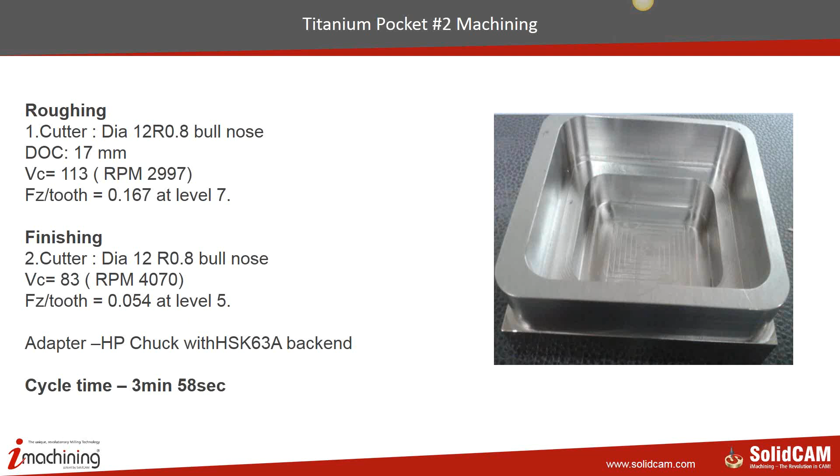The second pocket that was machined, it was machined using 12R.8, VC of 113, and the cycle time was 3 minutes 58 seconds. What's more important here is the tool wear, because they were really not bothered about the cycle time. We knew that cycle time was going to be lower than conventional cutting. But what is more important here is how did the tool behave during this entire cutting?

The diameter 12 tool that was used for the majority of the part, we observed a wear of about 0.1 millimeter on almost all cutting edges, which is very good when you're considering the fact that you're cutting these tough materials. Okay, you can see that there's almost uniform wear that's come up on all the edges of this particular tool.

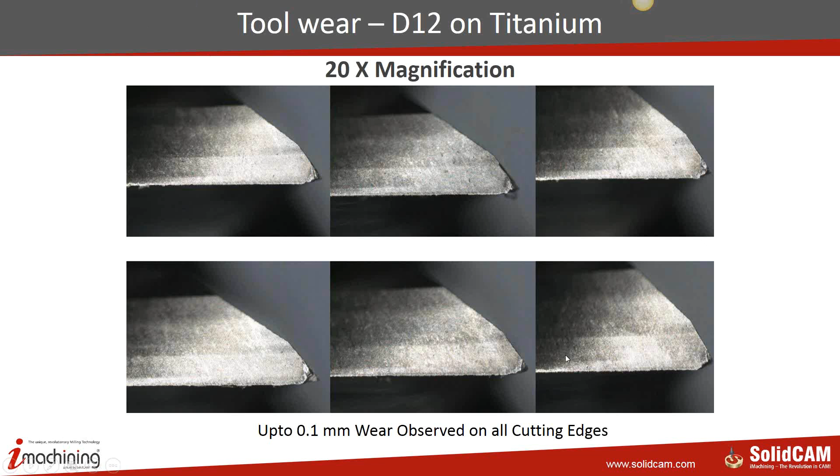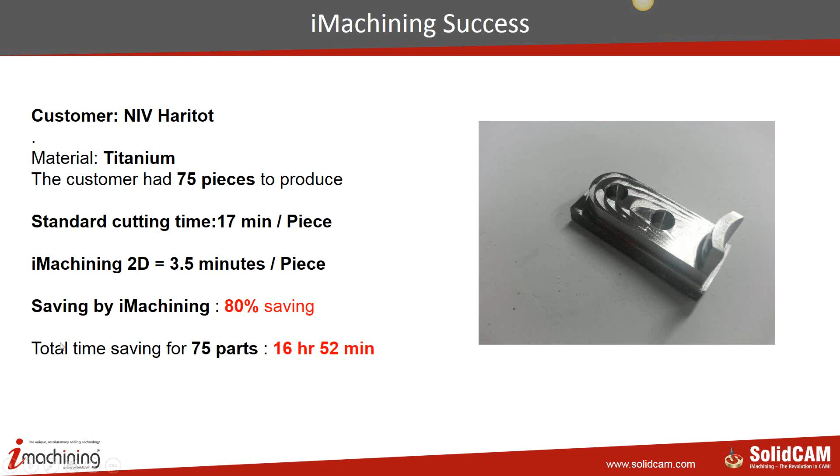We did another trial with ISCAR here in India, and it was an Inconel 718 on a Hermle BMX 50, diameter 16, chatter-free end mill, and the suggested VC by ISCAR was 45. iMachining at level 4 generated 81. ISCAR's estimated tool life was 26 minutes. iMachining achieved a tool life of 86 minutes for this tool, for this material. Okay, so it was dramatically almost 3 times the tool life.

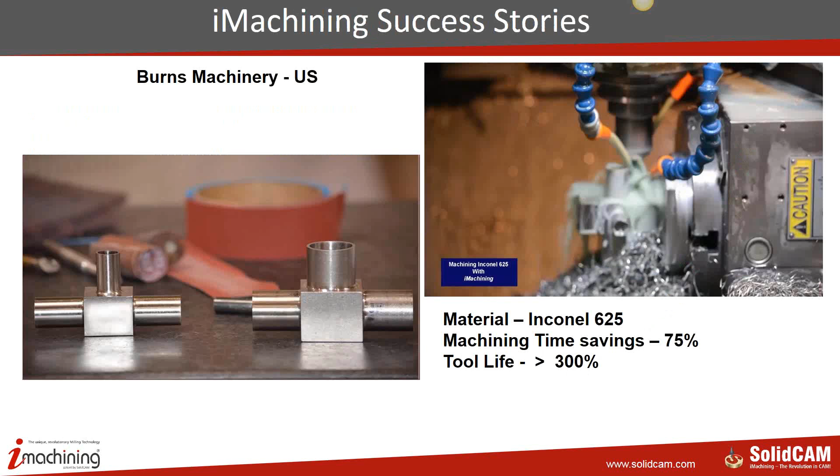Burns Machinery, 75% savings. This is a customer for oil field equipment, savings of about 86%. Again, they machine titanium and Inconel.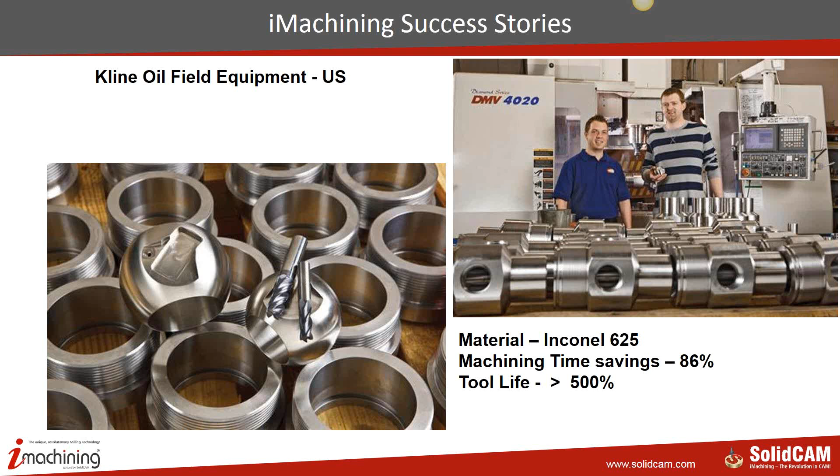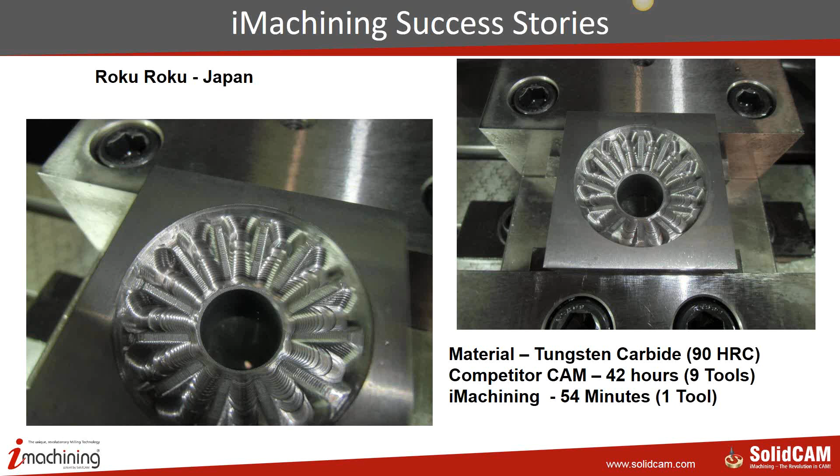Okay, let's go back to our part and see. Okay, we've done, it's generated. Let's run the simulation. Let's run SolidVerify and run the simulation.

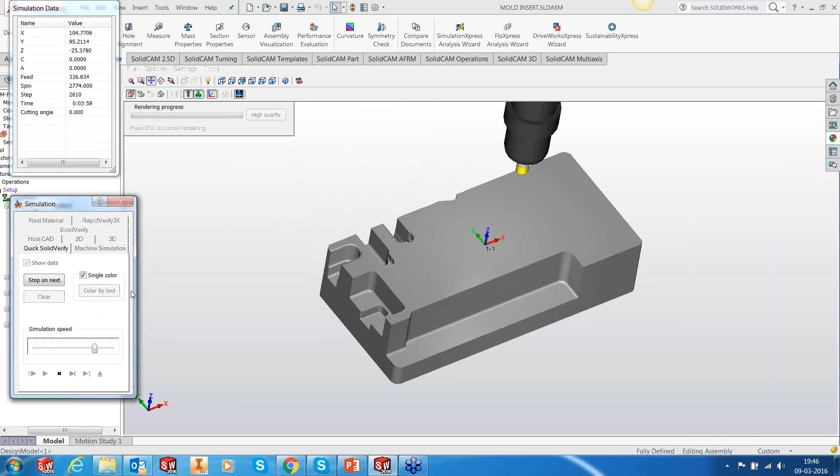You can see that most of the machining, or the volume removed, was removed using 2D iMachining. So the bulk of that has already been done by iMachining 2D, and the internal small areas are now being handled by iMachining 3D. Now this is like 34 minutes for the entire part. Okay.

Right. We can then apply our HSR strategies. For example, we are going to cut the part from another side because I'm using a 5-axis machine. So I'm going to cut the part from the second side to machine the remaining material. So I use HSR. The best part about SolidCAM is that the stock is being constantly updated and it gets passed on from process to process. I don't have to save or do anything.

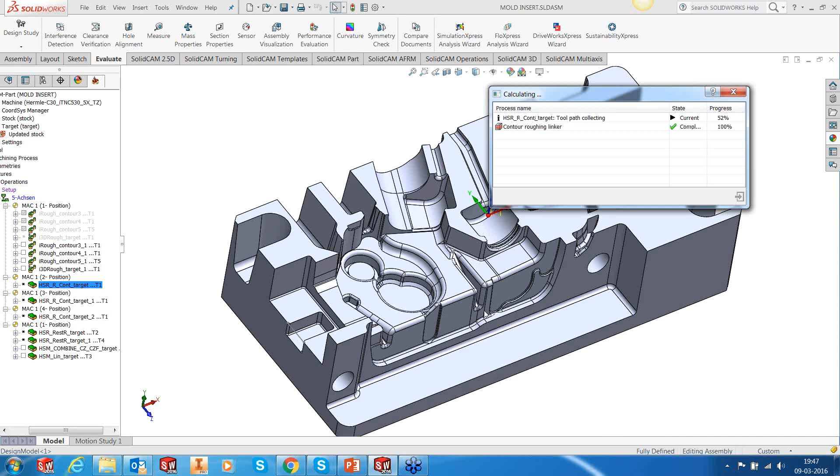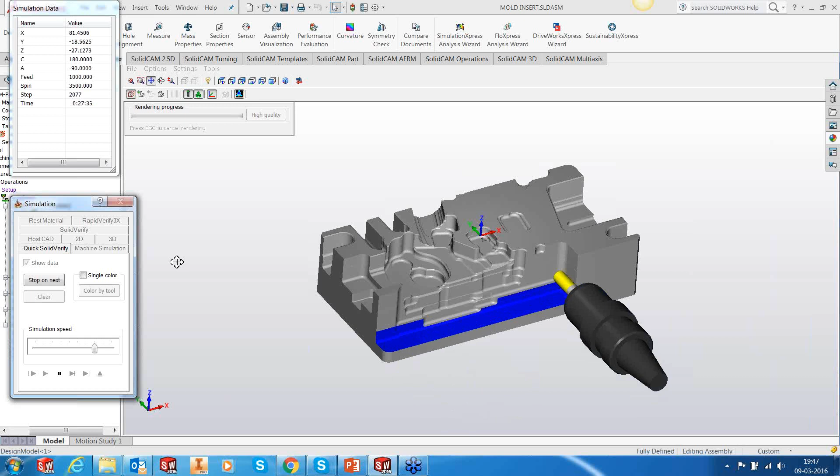For example, you can see this, run the simulation, SolidVerify. Okay. Let's remove the single color and start. You can see that from this side, I'm cutting it. And the same methods can then be extended over from all the other sides, wherever it's possible, and then apply our finishing strategy. So what is more important here, the takeaway from this entire process is that, first of all,

iMachining, when you're cutting such tough materials, helps you to bring the best out of your cutting tool. It helps you to bring the best out of your machines. What you are probably using in a conservative way, iMachining opens that up completely. Let me show you another part. Okay, this was a classic part.

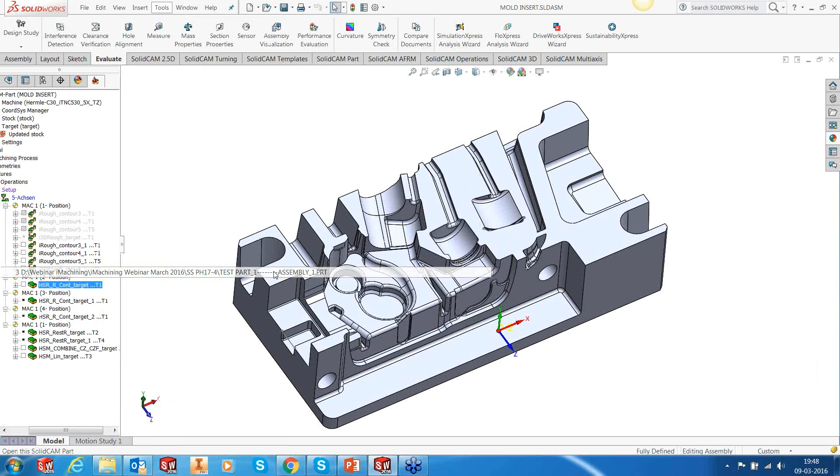Now this was for one of my customers, because they wanted to buy a machine and they wanted to check the kind of MRR the machine generates. So they evaluated several machine tool vendors, and if I measure this part, this is about 250 by 64, and the height is about 39 millimeters, and the cutting depth is about 31 millimeters. Okay. So they asked several machine tool people to come up with an estimated time to rough this part.

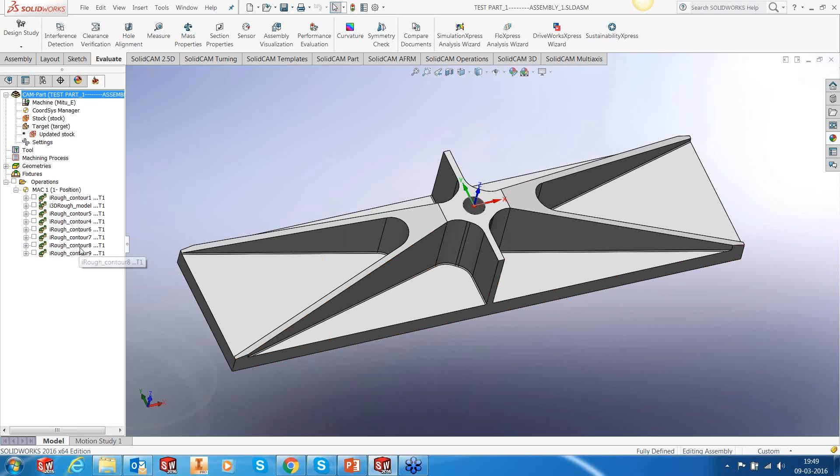Several people started at 40 minutes, went up to 1 hour, because it's a pretty big part, and the material was stainless steel, PH17-4. That's like 50 HRC, 52 HRC. It's really tough to cut this material. So based on the material and the machine conditions, the estimates were given. What did iMachining come up with? And this part was done in front of the machine tool people itself to show how best their machines could handle.

For example, to rough out, this was done at level 6 turbo because the machine had pretty good spindle power. So at level 6 turbo, on this machine, iMachining generated parameters of an RPM of 6,000 and a feed rate of 11 meters at a depth of cut of 31 millimeters. It really sounds impossible. People might think that I'm joking about these values, but this part was actually cut at these values.

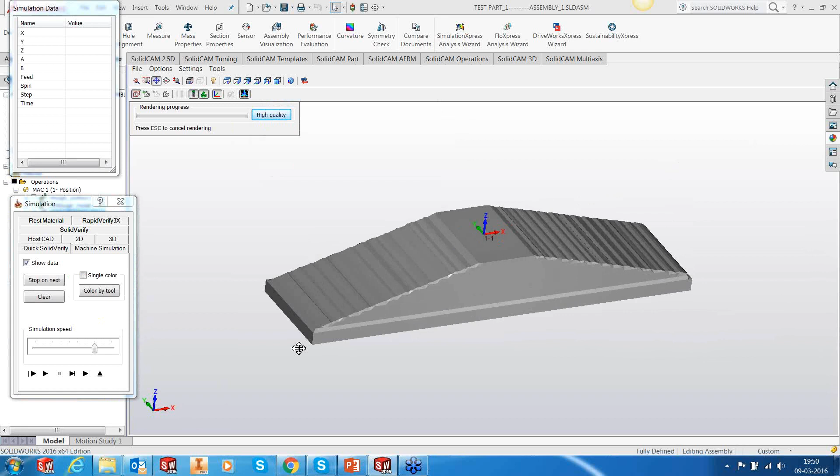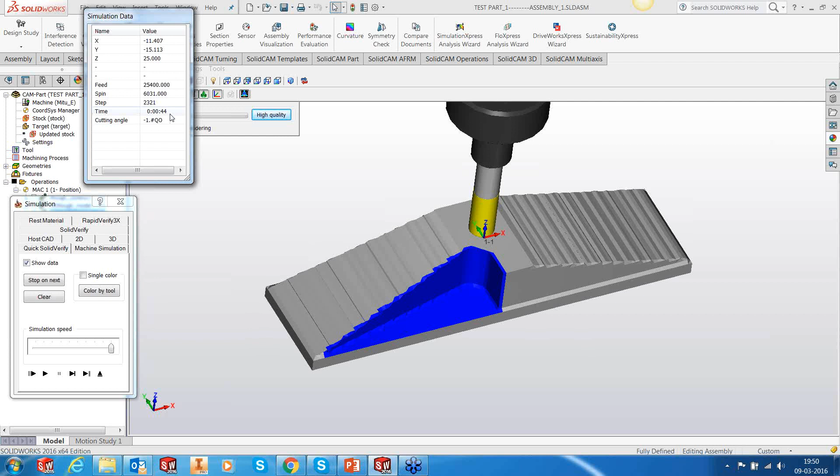Now, if I run the simulation, okay, first we did the upper slopes because we did not want to cut the slopes later on. Okay, and we ran the machining. It's 44 here, but it took about 1 minute 6 seconds on the machine to open up this pocket on SS 17-4 PH, 50 HRC. Okay. Similarly, we have got the other areas, 1, 2, 3, 4, and 5. All these areas were cut. So if I run the entire simulation for you,

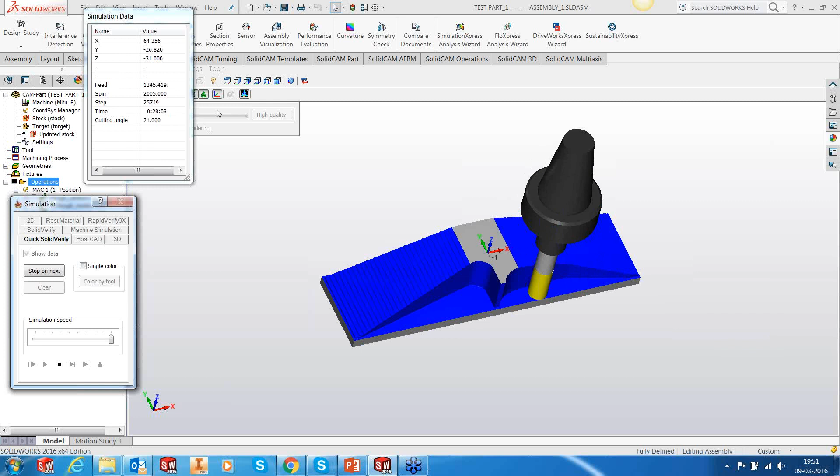we had estimates of about 2.5 hours, 3 hours, and so on from various cutting tool manufacturers and machine tool manufacturers for this particular part, because trust me, this material is very difficult to cut. And the customer was looking for under an hour to cut this part, because that's where he makes money. If he exceeds this time, he starts losing money.

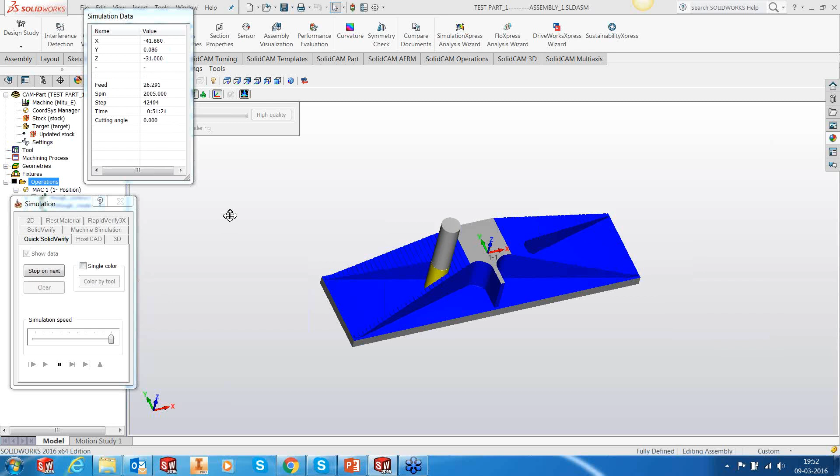It appears that the tool is stationary, but it is not. It's actually moving. So the time generated was about 58 minutes. This part was done much earlier than that, because the first tool path that took about 20 minutes was regenerated using a much more aggressive pattern, and we generated this part under 45 minutes of cutting.

So what is important here is that iMachining, in conjunction with the things that I told you of tool holding, the tool geometry, the fluid coolant, the kind of percentage mixing that we need to do, work holding, together with all this, with iMachining like the icing on the cake, you can actually machine any tough to cut material like Inconel, stainless steel, titanium, effectively, not compromising on your tool life, not compromising on your spindle load, and at the end of the day, you make money.